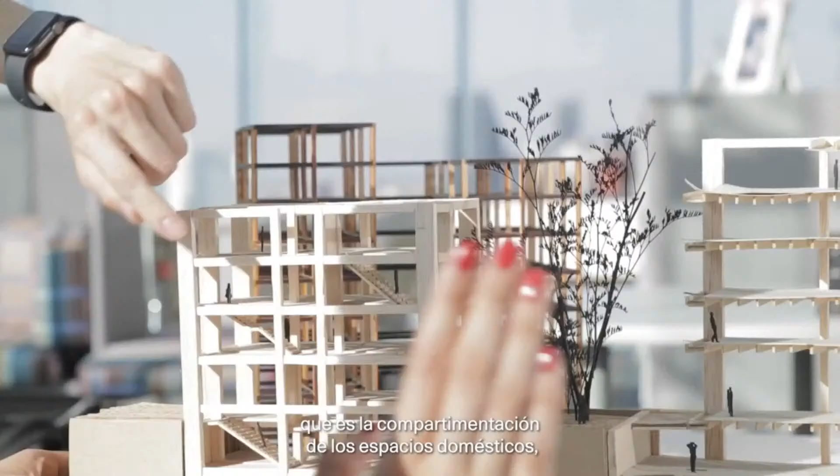Una de las cosas que aprendí en la maestría en vivienda es a no entender la vivienda de la forma tradicional, moderna, que es la compartimentación de los espacios domésticos, sino entenderla a partir de dinámicas familiares, de otros tipos de habitantes, una vivienda entre roomies, cómo es una vivienda para una abuela y su nieta.

Un cambio que hubo en mí fue como una capacidad de sorprenderme en cosas que normalmente daba por sentadas. Mi nombre es Bettina Rincón y estudié la maestría de vivienda en CENTRO.

Definitivamente, después de haber estudiado diseño urbano, veo la ciudad de forma muy distinta. Veo sobre todo, pues, qué se puede mejorar, ¿no? Cómo cambiando pequeñas cosas podemos hacer una mejor ciudad.

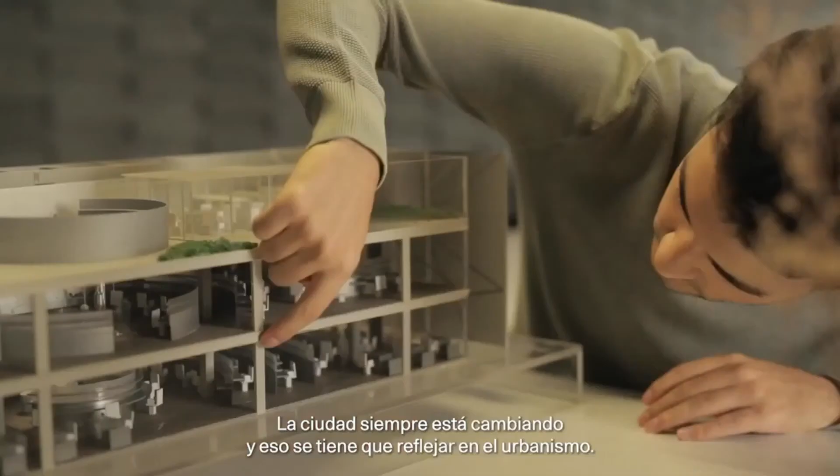La ciudad siempre está cambiando y eso se tiene que reflejar en el urbanismo. Espacios en donde nos sintamos a gusto, en donde podamos convivir, cómo lo que ya está hecho lo mejoras, que motive a la gente a salir de su casa y realmente a generar comunidad. Soy Esteban y estudié la especialidad de diseño urbano en CENTRO.

Yo me quiero dedicar al desarrollo de viviendas sustentables y me siento muy feliz. Creo que sí estoy en la carrera correcta, definitivamente. Me encanta lo que hago, todas las cosas que he ido descubriendo de mí, de la gente a mi alrededor.

Creo que lo que tiene que hacer la arquitectura es dejar de resolver por el camino fácil. Pues creo que podríamos aprovechar mucho mejor el agua, la energía solar, la luz natural, el calor natural, hacer de la naturaleza nuestro cliente principal.

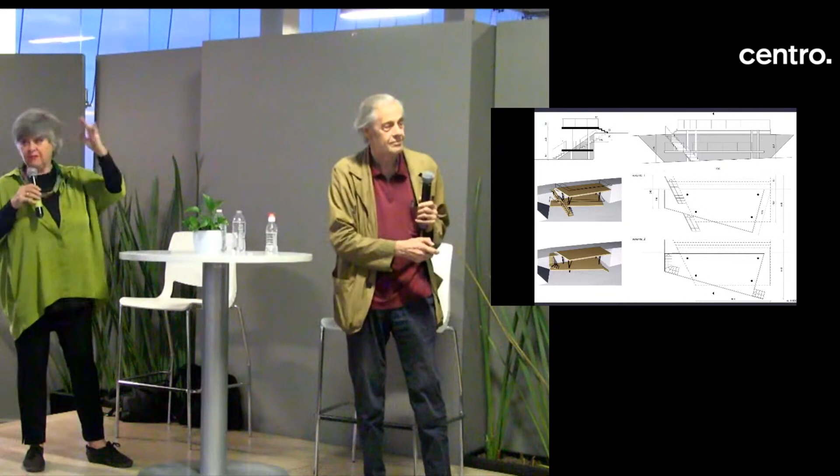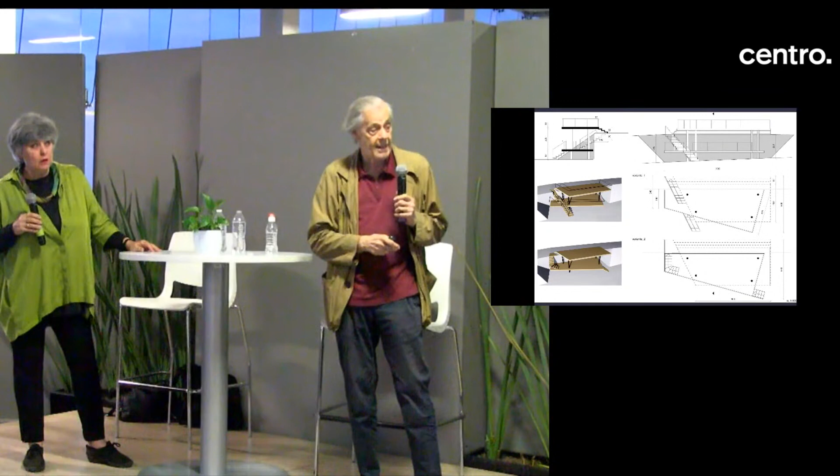So we have a slope, and two levels of terraces, and this offers the general view in a frame, like we know from Chinese landscape architecture. On the slope, we put this building between the two levels of vineyards. On the lower level, you have this framed vision of the landscape, and on the upper level you see what you always see, but from a different point of view.

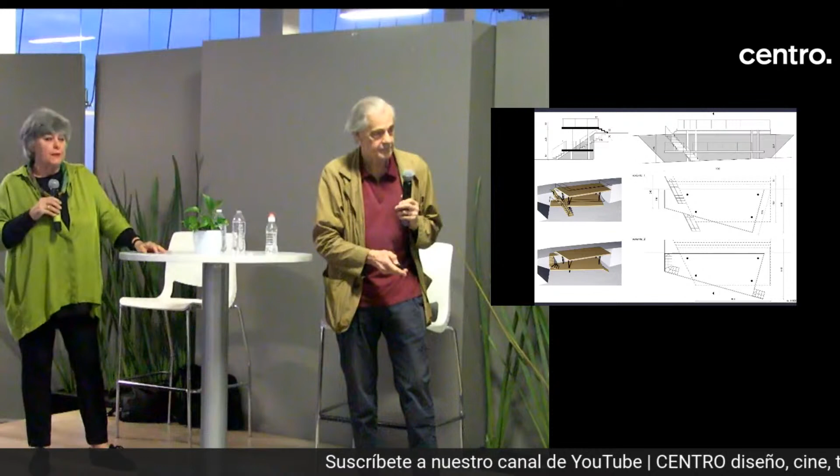The stair construction is made of steel columns and wooden decks, and of course railings. Here you see the slope. We have cleaned it up, as you usually do when you make a very little piece of architecture.

The idea was that this is going to grow in future, and it's sort of overwhelmed by nature. In the ground part, you have this framed view, and in the upper part you see it from a different point of view.

So it starts to grow. We even made a wine cellar here on the left side. And later, plants took over. So this is a kind of wine cellar where this wine grower can present his wines.

The idea was that he is going to present his best wines to international clients on this gazebo. So after it was finished, the son of the landowner made an opening party with 300 people, and from then on they used it quite regularly, while the plants steadily found chances to grow.

Now nature sort of prevails, and it disappears in a way. It's a metaphoric statement, and today we have achieved a state where you almost can't see it anymore. When you go inside these platforms, you have to discover the view, you have to conquer the situation.

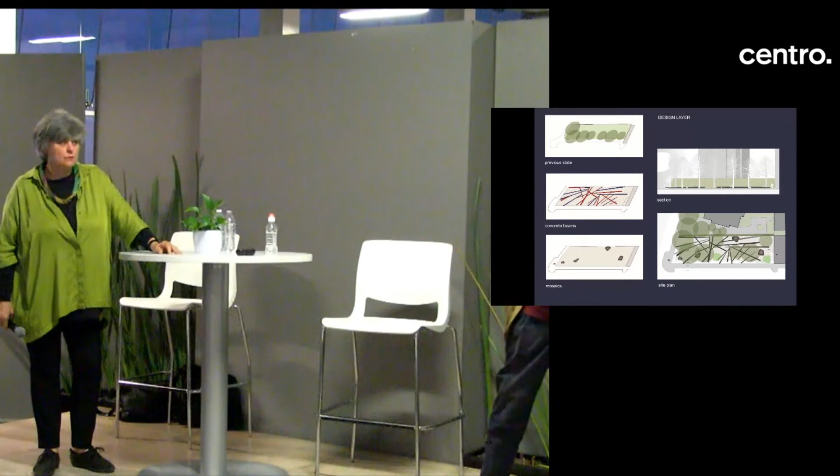So what are the layers of our design? On one side we have these 7 trees I mentioned. We did research about the beams, as I told you, that as a result of the fire the beams fell to the ground. We have a layer of beams as elements in concrete - you will see how it works.

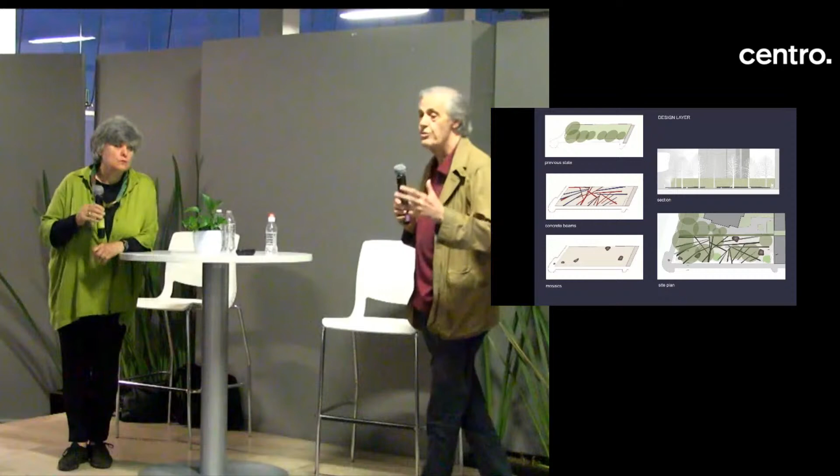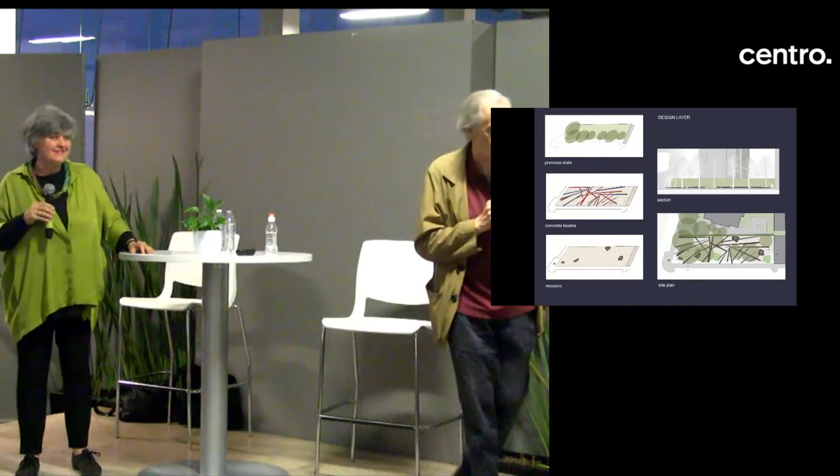We have mosaics which deal with subjects of Jewish religion that are at the same time important in Muslim religion today - fruit, vegetable, fig - but even elements like energy drinks which youngsters use today, Coca-Cola or something like this, and a pack of cigarettes too. So bridging the situation of today. And then, of course, you see a section and the final site plan.

These are prefabricated beams in a dark anthracite color. You see it from above, and the idea was that this is at the same time a kind of a cry for what happened. It's a graphic design, but it's organizing a space, and at the same time it's also furniture which you have there.

That's how it looks like. These beams sometimes arise from the soil, sometimes they go inside. Happy enough, we have various colors of sand, so we could order this curry-colored sand. You have an explanation of what happened there, but actually nothing else. And you feel that there are other rules than in general.

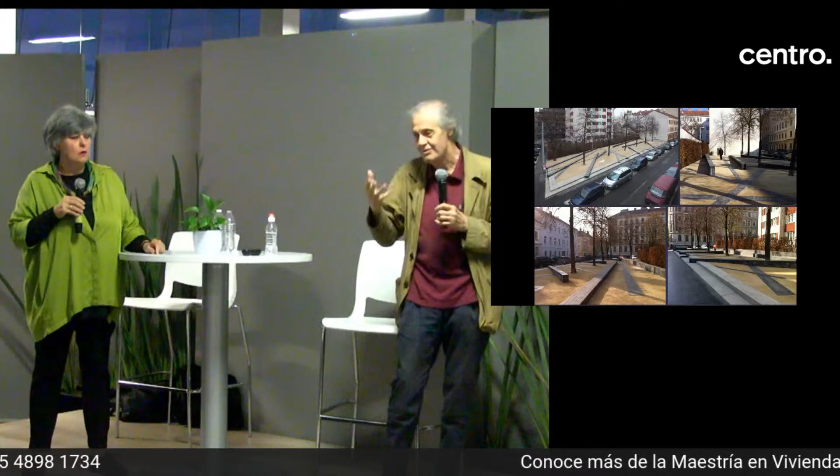The fascinating thing is that the young people who use the youth club around the corner are really silent on this space, and I asked them why. They said, this is like a religious space. So they feel something which we hoped to communicate, but it really happened - because there is a text on a big wall at the end that explicitly says what we are telling you now, so people know.

Here you see these mosaics we are talking about - subjects from the two religions which also correspond with everyday life. And it works in winter, in the snow, it works with rain. It's good for all seasons to meet.

For us it was very impressive that the youngsters from the culture club, from the Muslim culture, called us up saying, hey, go there, the dogs are destroying your design, hey come back, you have to clean up. So we had some sort of relation with the neighborhood during the opening of this. We presented this work in Tel Aviv and in Jerusalem, at the university, and we were a little bit concerned how the reaction would be.

The interesting thing was that students liked it very much because this remembrance site is abstract and not as realistic as very often these kinds of remembrance sites are. I think this topic is very current, as for instance in Argentina, or in Chile, or even still today in Spain.

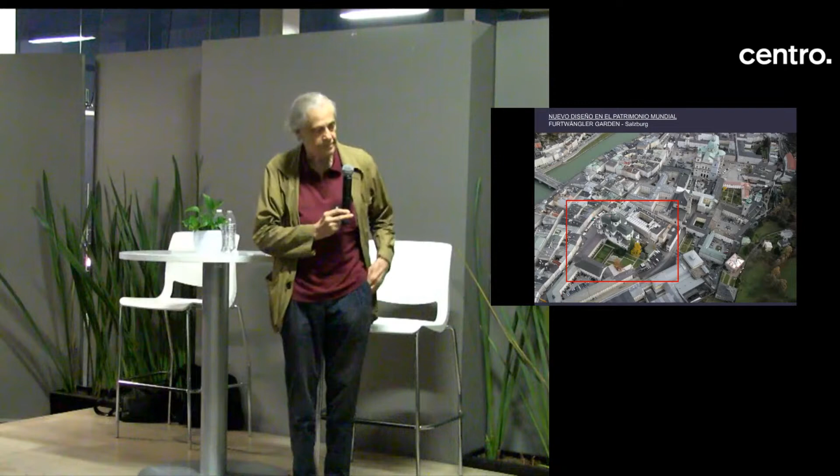What María mentioned is that these green spaces are always courtyards of monasteries—you only have framed gardens there, but no park in the traditional sense. So the question was: how can we find a design idea? How do we approach it? What is our reference field?

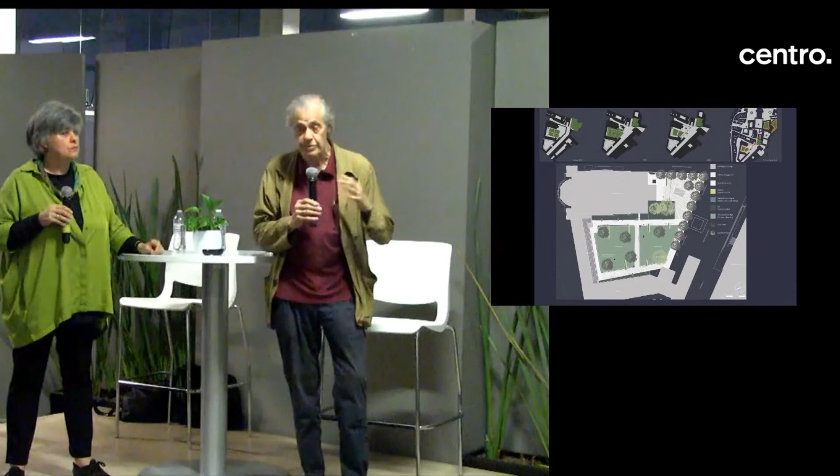You see here, we have these framed gardens—that's what we find today. This was the original situation from the 18th century, and this was the garden from the 1970s.

Our idea was to work with this frame concept. But the frame today is a path, not a wall anymore, but a very large path. You have to consider that this is a rather small area—2,500 square meters, not more. These paths are 6 meters wide; you can sit, walk, and gather there.

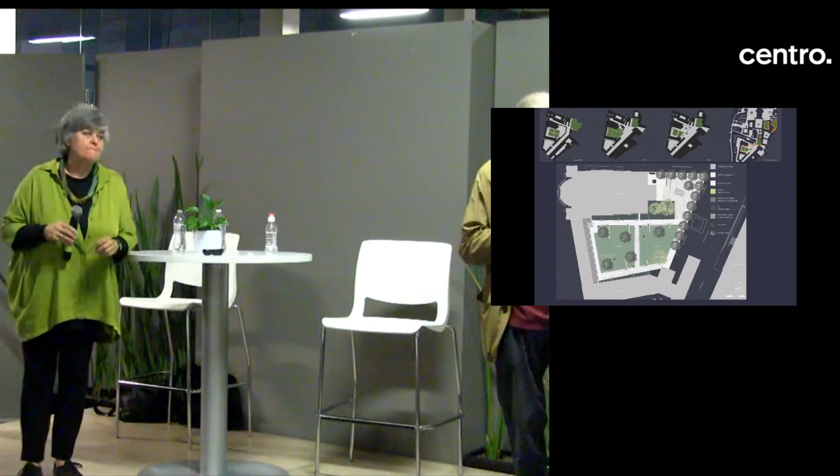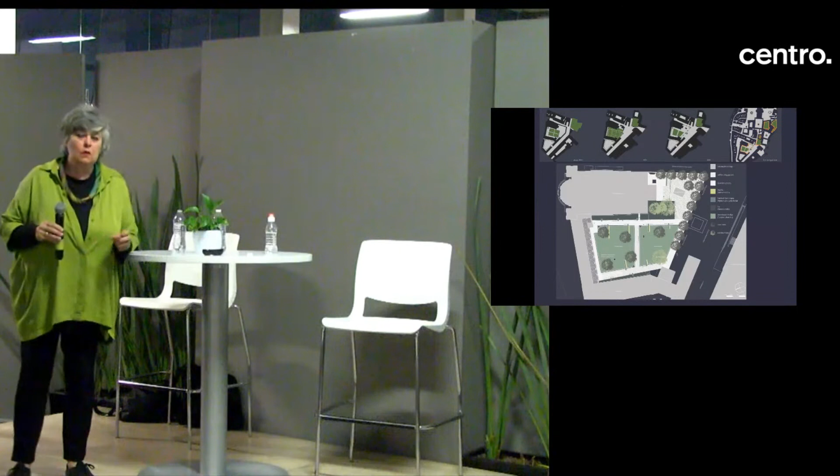And we have two lawns which are 27 centimeters lower, giving another feeling of space—27 centimeters in an open space is quite something already, you can feel it. We have sophora trees, and in homage to the Salzburg Festival Hall, we have these hedges, which act like scenography within the park, like a garden theater.

What's important now is the contradictions and paradoxes in how we approached a solution. The students of this faculty wanted special furniture. The festival hall wanted a stage where they could perform. The Liberal Party of Salzburg wanted the biggest playground area they could have. Our idea was to create an empty space—a sophisticated empty space—in which different kinds of events can happen.

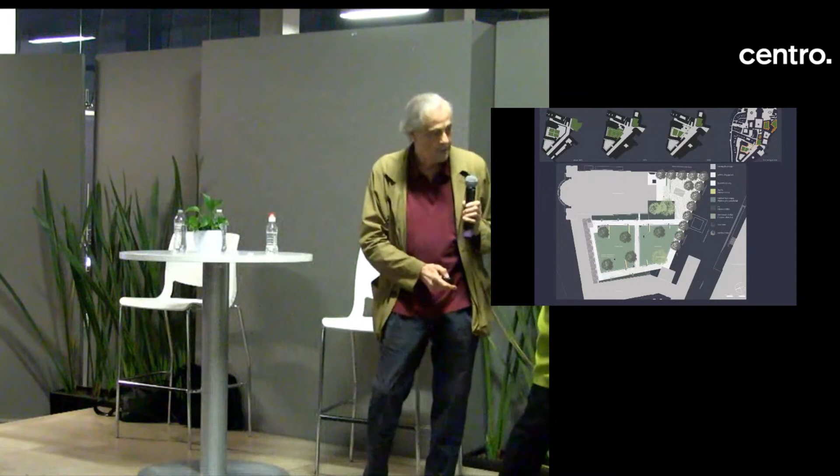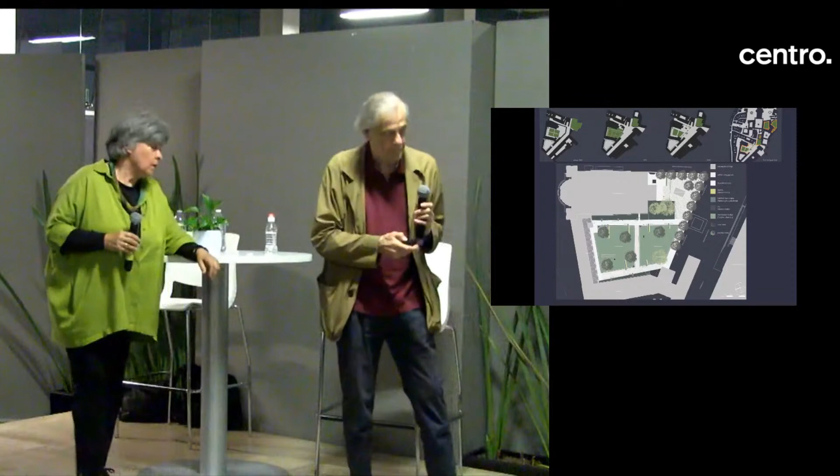We'll show you how this looks. We proposed and placed a piece of art, this pavilion by Anselm Kiefer, between religion, church, theater, music, and art. The central access paths are paved with natural stone, the others are gravel paths, and this whole area is covered by gravel. You see these sunken lawns and this scenography—it's actually a sculpture park with few but carefully chosen sculptures by international sculptors.

The frame of the linden trees also relates to the castle on top of the hill. The hedges relate to the entrance of the Faculty of Medicine, and the placement of the sculptures is located in this hedge garden. The hedges always overlap the path, which creates a little irritation—it's a bit unusual, but it still works with the historic ambience.

What's important now: the Salzburg Festival has performances there, the students like it, and tourists go there—but we didn't design functions. We designed a reduced space, and in this space, different events, different situations, different moments of everyday life can happen.

So there are a lot of fine details, and that's something we take great care of, to have a good stonemason, a good functioning design. And underground, there is a wild torrent running, a river. We have also shown above on the gravel the flow of the river. We have at night a lighting concept, and we have some fine detailing on how to create ramps and steps.

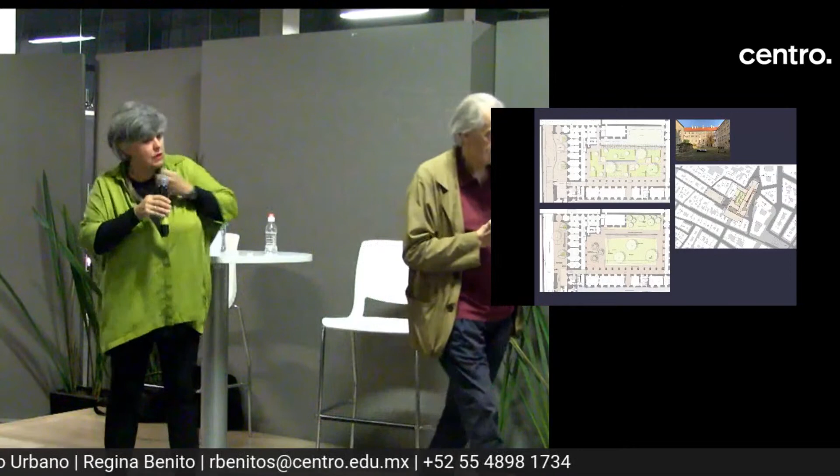And there was a neglected open space. Nobody knew this space. It was in a very bad condition. In the competition, we were the only ones who said, well, we have to use this, and it should also be a public space. The idea was to create a meditative space for the academy, which is at the same time a space for the public. You see, this is close to our cathedral, with very few open patios in this area.

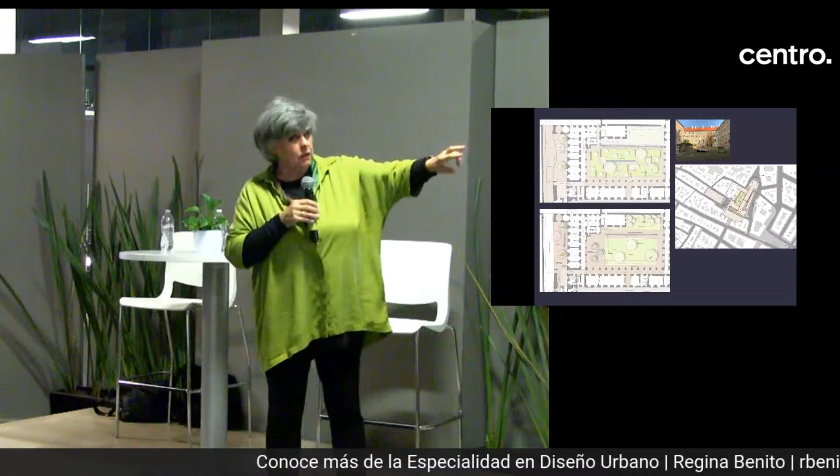The concept for the competition with Riepl Architects included a water feature and a pergola. It was a little bit like the concept for a monastery garden. We had a long water feature, and we had little squares to sit. You see how it looked like, really.

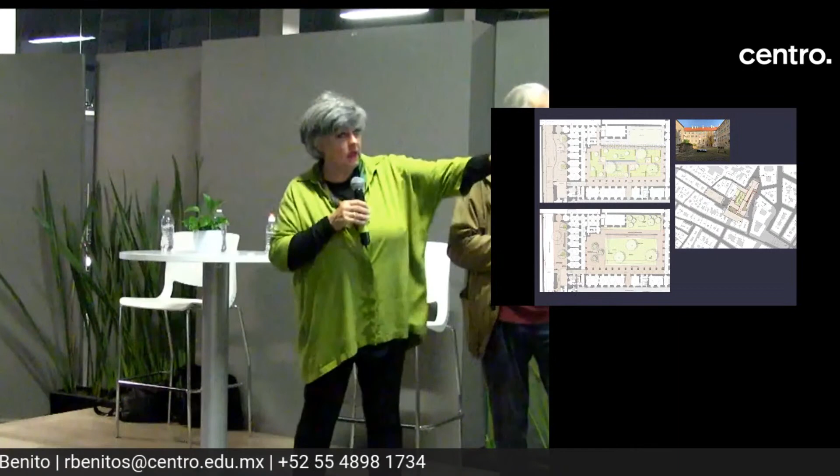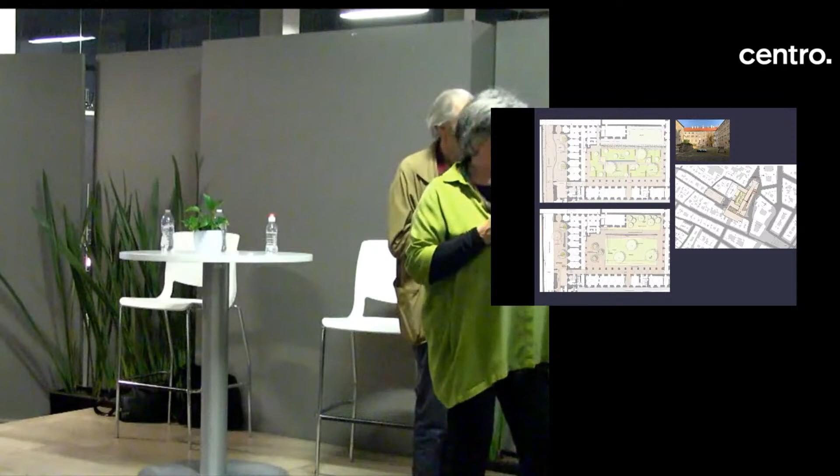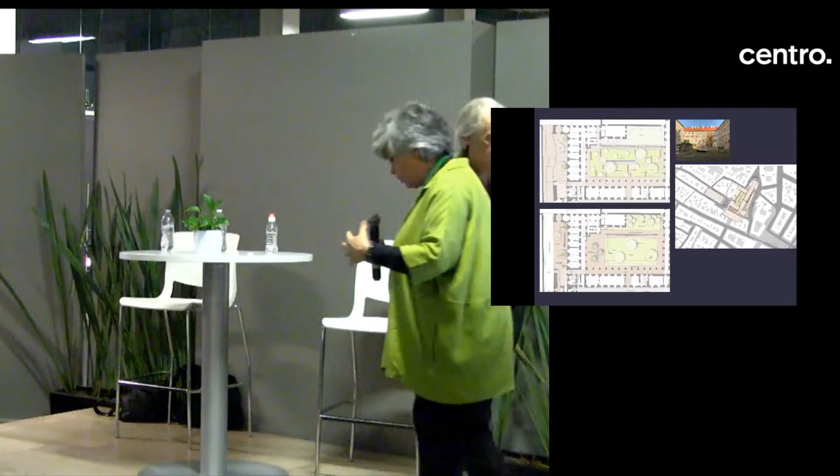We had a long pergola because this part is still used by the Jesuits, but that's what it looked like before—nobody had used this area in the last 100 years. So our proposal was to pass through, and the architects had the great idea to open this arcade, because it was closed for 200 years. Through this opening there is an interesting interaction of inside and outside.

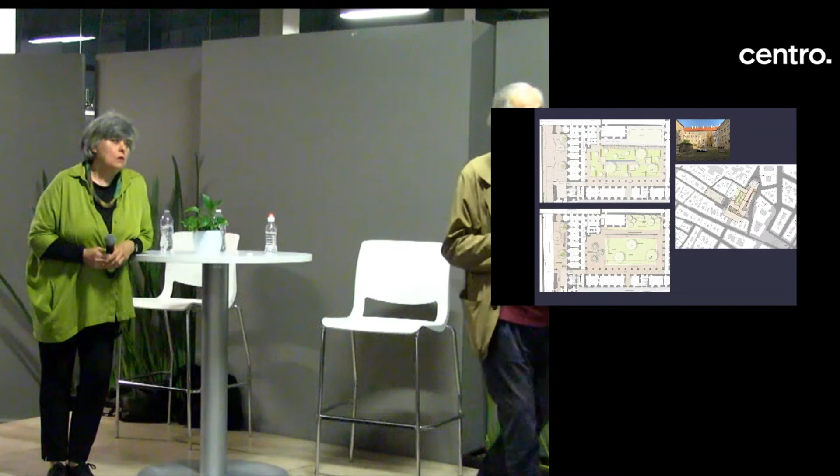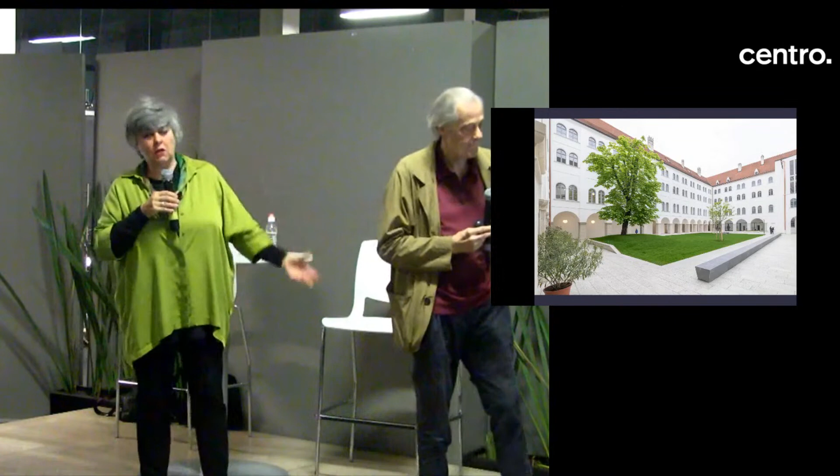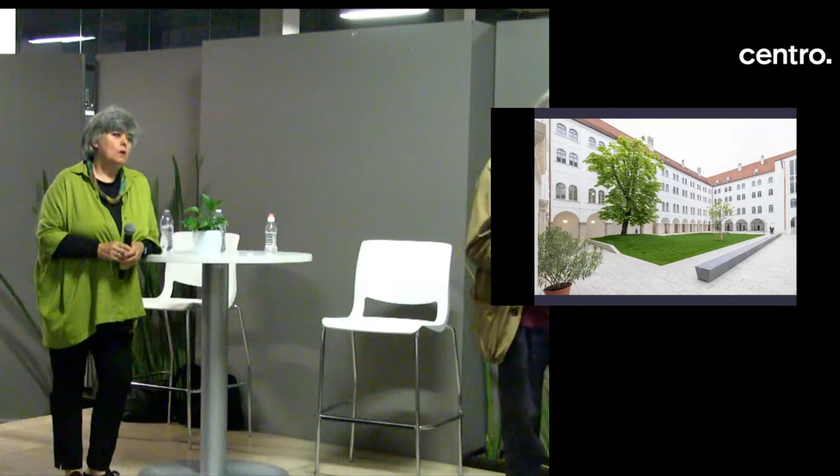At the end, we had to reduce the project also for financial reasons, as it happens so often. So we had a little square and this green area, as you have it here in your school, which served the Academy of Science. Actually, the faculty wanted space for 200 people to sit in a convention to listen to a lecture. So this long bench is actually the border between the area which the Jesuits still use and the other side used by the Academy of Science. So at the end we did very little, but this little work is very sophisticated.

And this is built over, but still from the 18th century. So we didn't have enough soil, or place for the soil, so we made this furniture, which at the same time incorporates these little multi-stem trees.

We also designed the entrance area, the entrance area in the public space of the street, to give an impression, like a visit card for the academy.

And here you see again, it's a place to meet, to pass through. Now it's really like a secret space for the public, but it's a meditative site, so to say.

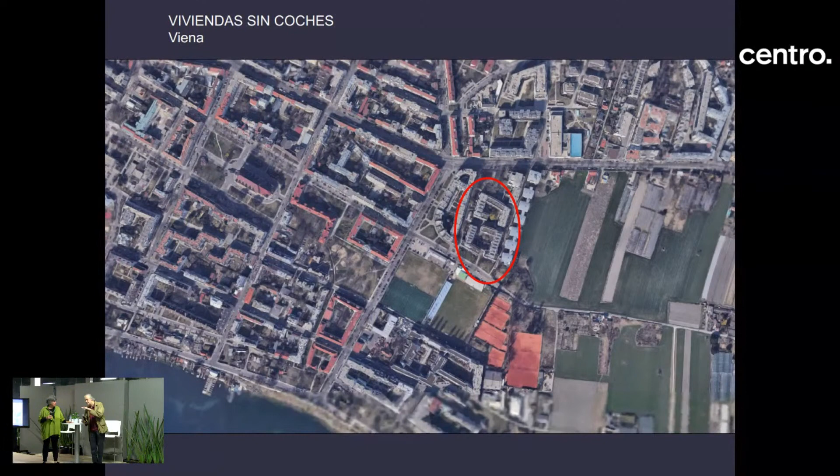Perhaps we explain it like this: we have till today competitions where developers, cooperatives, housing developers team up with architects, landscape architects, structural engineers, and economists.

And they are in competition for a certain site. And then when they win, they have to guarantee the price of the building for this site. So this is a quite incredible thing. And till today, all subsidized housing over a certain dimension has to follow this typology.

You see that this project was the first one which was not initiated by the Socialist Party, but by the Green Party. I just like to add, after the build opening and use of the housing, 5 years later, the City of Vienna clerks turn up for controlling whether this was all done in the proper way, so there is no way to cop out.

This is useful to show that in the beginning, some of these housing competitions on top of it had some social issues. One is housing without cars, because we have in our law for every flat 2 cars, garages. So with the money which they did not have to use for building garages, we were able to build roof gardens. So there was a change in the budget.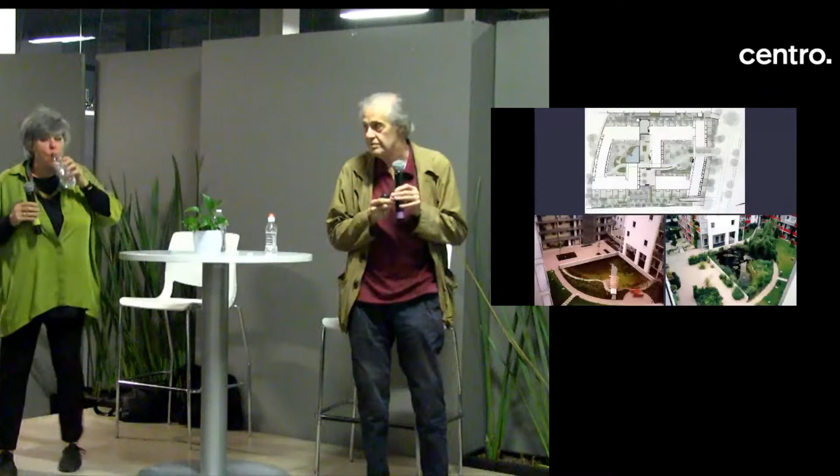And you have 2 parkings for each flat, like a big flat, or is that a method? It's like a minimum of... No, now we arrived at 1.2. 1.2 cars for each flat.

So this is a site plan. We have a courtyard with a pond, and we have a courtyard with a hill, and we use the roofs. All roofs have roof gardens.

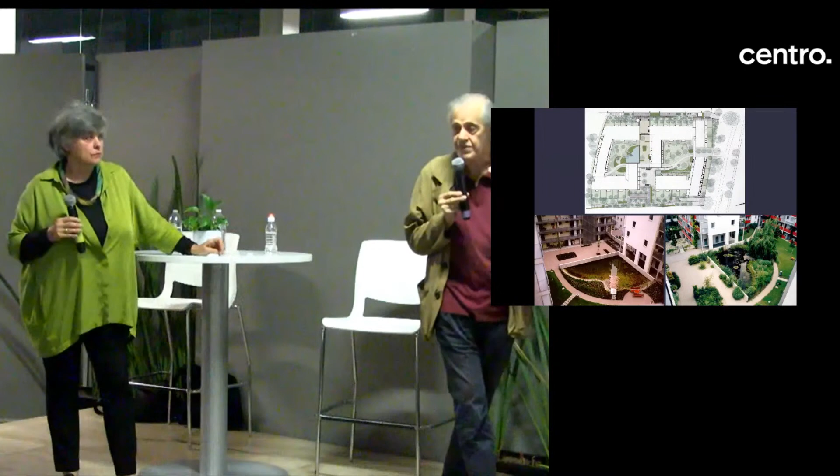Actually, it was done again, 157 families. Again, it was done with a group of already existing, like 120 people already on site. They were actually controlling for the biological products, whether they did not like styrofoam. So they went on Sunday on the building site and said, we are the future tenants.

We want to have a clean building site. And we had a group for the green, and we had a group for the child play. So they were taking part in the design process. What I explained you at the beginning is that time is like a building material.

So that's what it looks like when we design it on the computer in the studio. It's sort of implanted to the centimeter exactly. And that's what it looks like 10 years later.

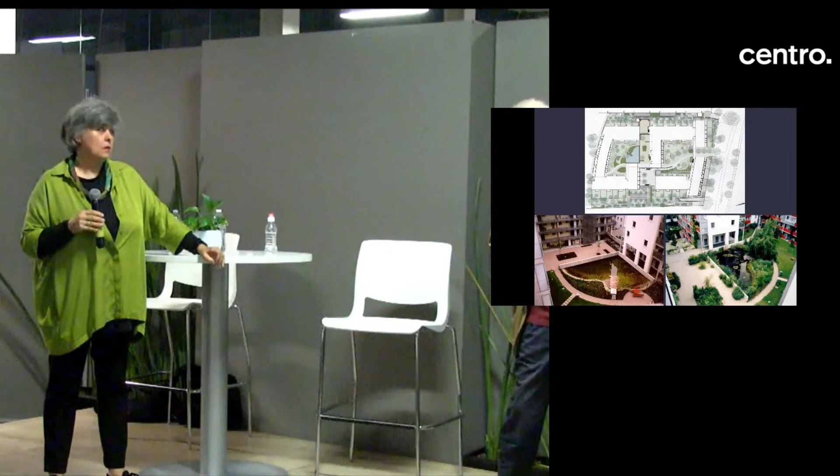But the important thing is, of course, landscape is not so wild in Austria as it is in Mexico. But this population wanted to have it as wild as possible. And their concept was as little maintenance as possible, because they had a deal with the city that they will do the maintenance themselves.

And therefore, photos 20 years later, it's really lush, thick vegetation. You see now how the weeping willow is on the pond. You see the sunken courtyard, which is good for parties, for the repair of bicycles. You see some details of what is nice about this project today.

Architects all over the world try to make architecture green. We are quite suspicious towards this greenery. But here it was really a conceptual thing by a special population, and they wanted to achieve this kind of sustainable architecture. And we can prove it works, because this is like 20 years later.

On the roof gardens, we had some roofs with vegetables, and we had the idea, these prefabricated guys, to enhance them, we can make them out of concrete. And they really liked the idea of vegetables of concrete. But 10 years later, the tenants even used their old bathtubs, everything, just to make tomatoes, peppers grow.

Yeah, the next project is much more recent. It's 3 years ago. We have won the housing prize of Vienna together with 2 architects. And we had the chance to make the layout, the design for a common space in this area and to work on this central site and to make the master plan for the outdoor spaces in general.

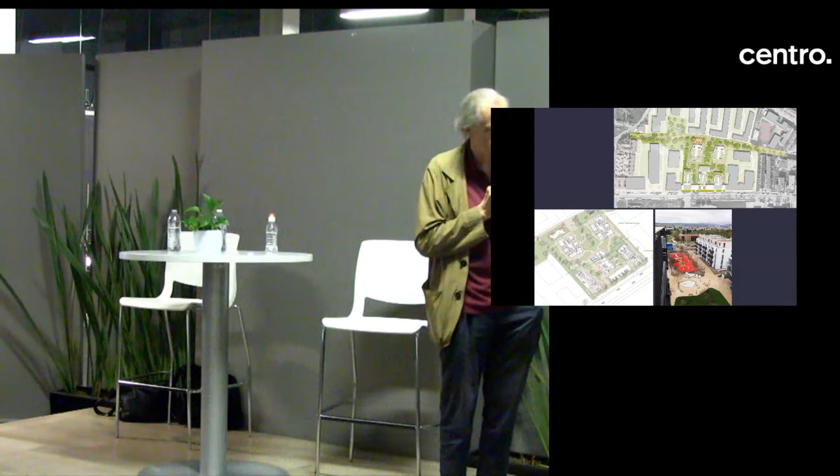In this case, you can think about 1,500 flats. It's real big, big for Austrian conditions, for our country. And actually the competition for the central core was quite interesting because we had the program that the fire department has to go through, the police has to go through, how to manage not to make a traffic-oriented landscape, but a landscape that is enhancing and connecting.

That is the word île flottante, which in fact is a sweet dish, what you call in Mexico postre, made of vanilla sauce and white dumplings. And that is what gave us the idea of these floating islands. This is also a kind of sociological concept behind it.

I just wanted to tell you, as we had developers here, we really invested in the playground. I think we have to invest in children. That's very important. They are not the last thing, the playground, but they were, in a way, the main thing here.

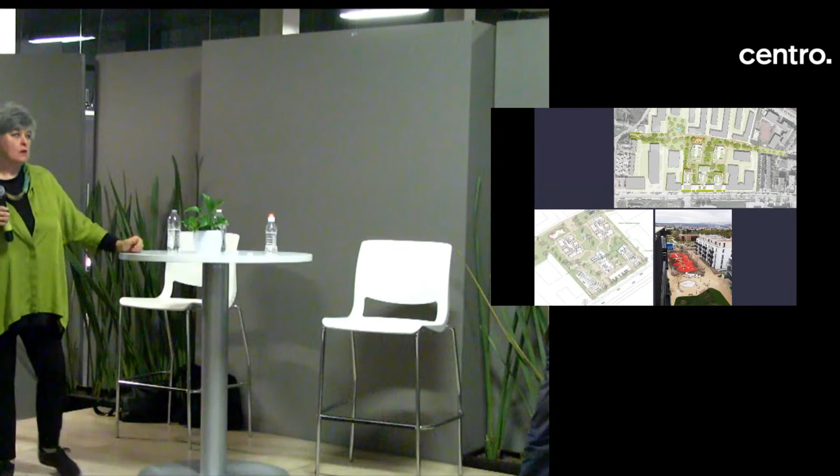We have this concept of public space, semi-public and private, which is a kind of sociological trap that we still move inside. But today, when you walk with your earphones, when you talk into your iPhone, public and private in the traditional sense don't really exist anymore.

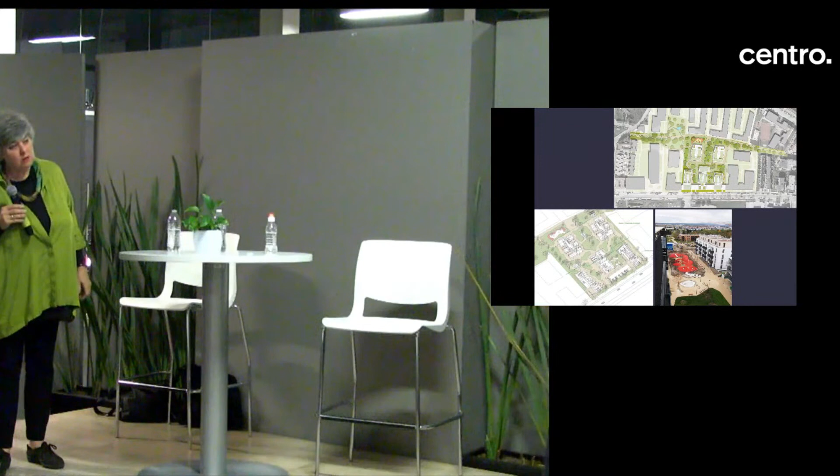So we created not paths as we used to, but a sort of floating islands. And when this path-like situation becomes larger, there's always a communal use of the ground floor. So they have, let's say, a meeting place, or some sport areas or cultural areas. Then it becomes larger in the layout.

So on the photos, you won't see the color of the plants. You can see it better, what this floating arrangement is. The photos are made in winter, but it gives you the texture of the arrangement. And we like color-coded plant design, so these are blues and purples. You have to imagine there are peppermint and lavender plants.

So here you see it 3 years later. The vegetation is, of course, dense already. And here you see this rather large sculpture for the playground. You have this sort of private feeling within this communal use space.

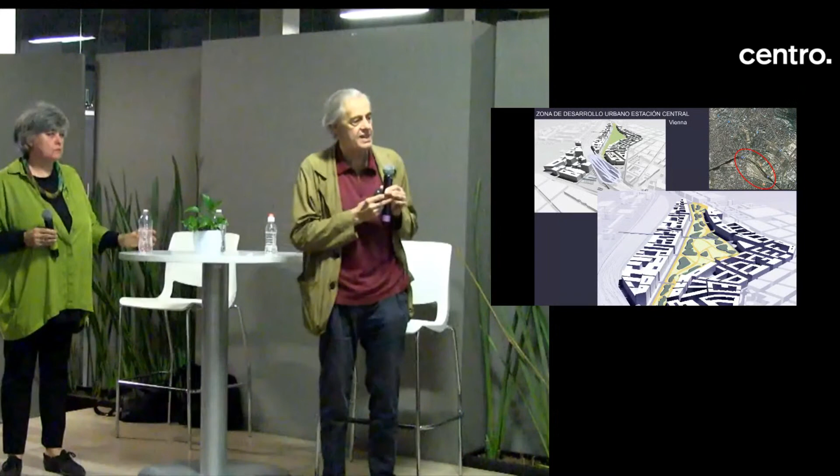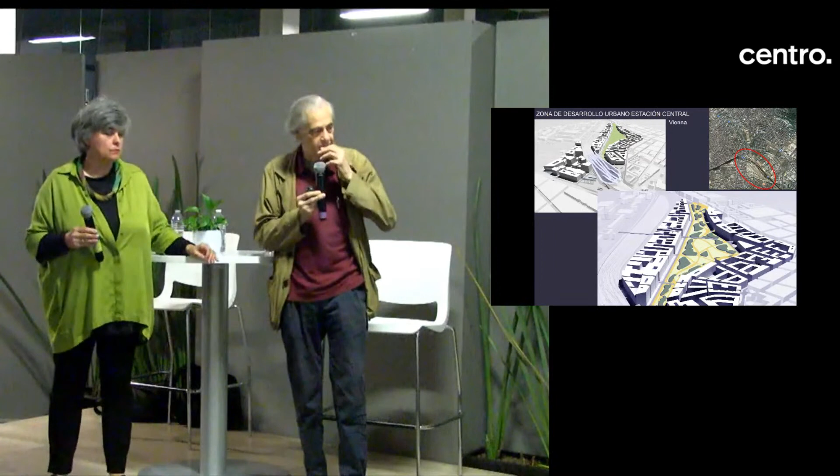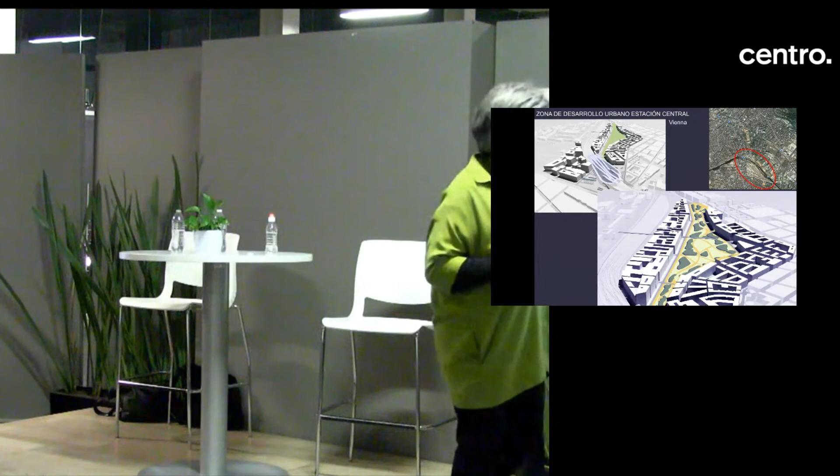The next two examples we'd like to show you are from a field we call landscape urbanism. The first one is the central station of Vienna, which took us 15 years, from the master plan to the end of the detail constructions. So here was one of the main railway stations of Vienna, the Southern Railway Station, and you had all the tracks in this area, and the city decided to make a new central station.

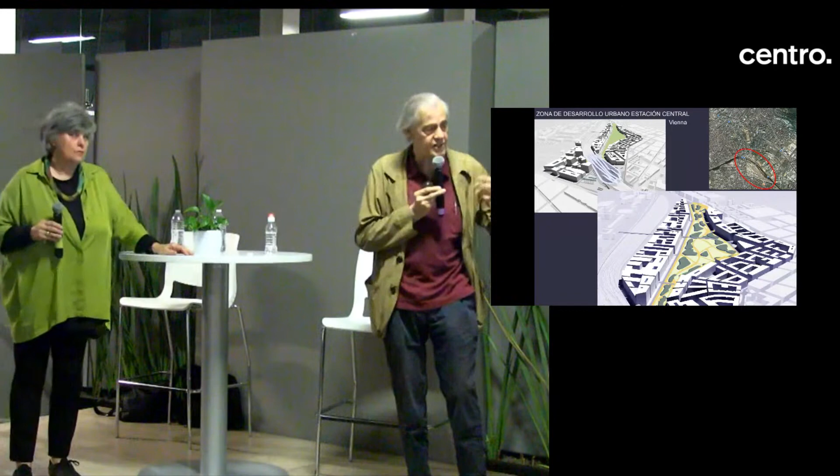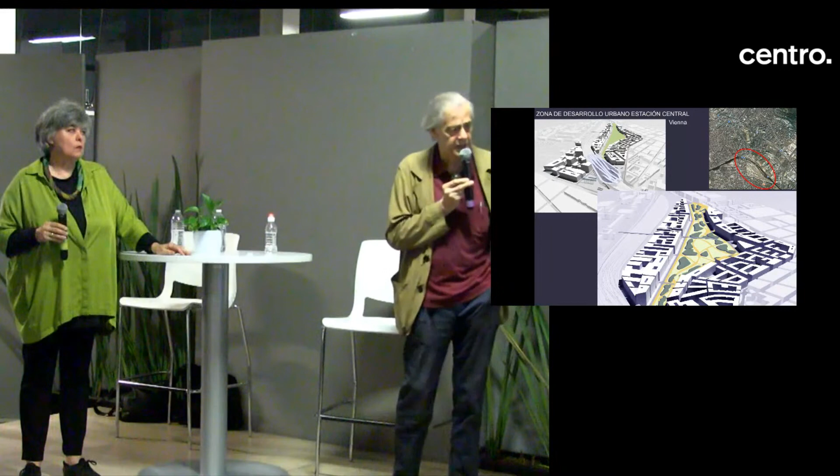Today the big European cities have very little land to offer for housing, always less and less. These areas of brownfields or railway areas are the last ones which are really large and can be used for new housing projects. We teamed up with an architect and had the chance to win the master plan. From the layout of the city, it's still a rather traditional concept, but the idea was to place a sort of central park into the middle, and these building sites should have interesting internal courtyards, with transparency and connection between them.

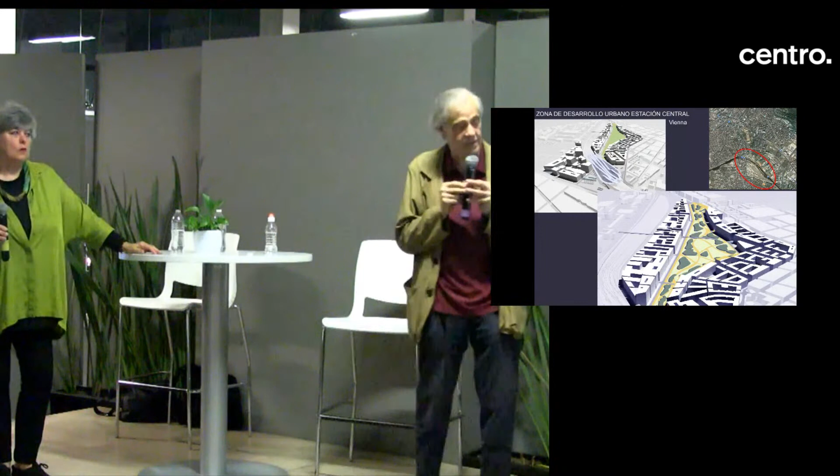This was a new competition, and we changed the master plan in this area. After this urban planning decision, first prize, the architects built the train station, and we concentrated on the next step, the office buildings. Our idea for this park was that with the concept of sustainability, we have a sort of group of dense trees, groves, little forests, so to say.

We have a complex path network with a special landscape of ornamental grasses, and we have ponds, sort of larger water sites. This was the idea for the master plan.

And then, of course, when we meet reality, this area became smaller. There are no ponds. They made a competition for the park, but as we had won the master plan, we couldn't build the park, we couldn't take part in the competition for the park. But at the end, a Swiss architect won this competition, and I think it's nice to see that they really realized a very large green area. You have to imagine that each of these building units is the result of a competition for social housing.

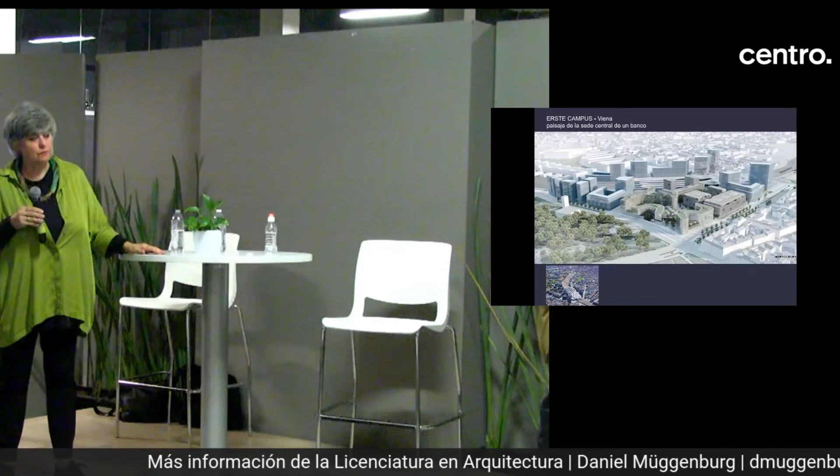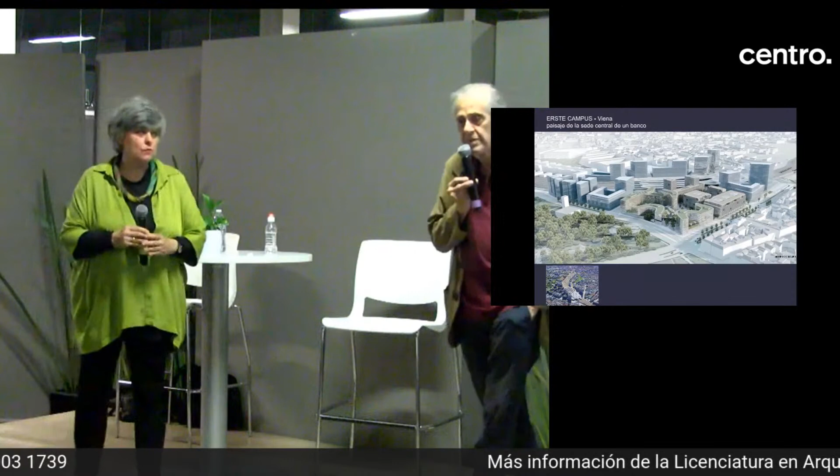And this part at the beginning of this whole area, which I spoke of before, there we changed the master plan. We teamed up with a very good team of architects, Henke Schreieck from Vienna, and we could win this. This is a headquarter for the largest Austrian bank, with 4,500 collaborators. The bank decided to choose this location, on the fringe of a working-class district, to make a symbol and a statement of education on this special traffic junction.

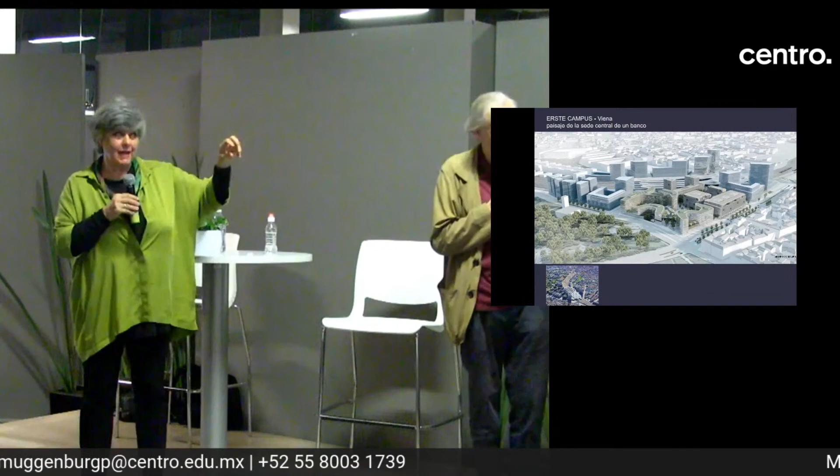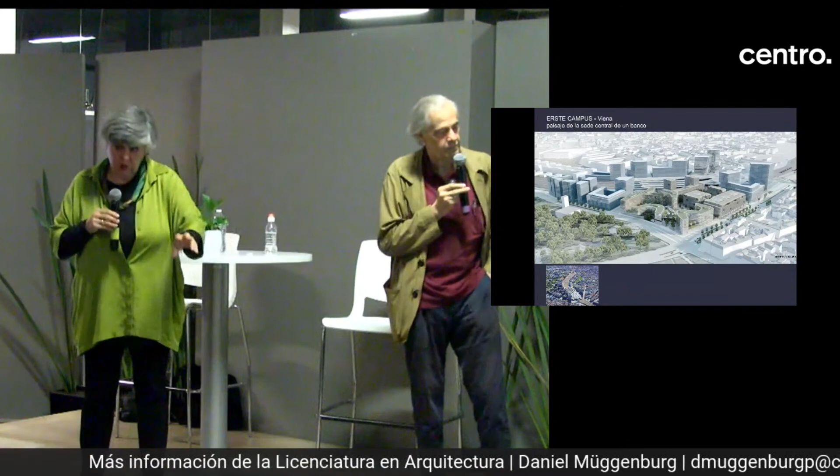Interior-wise, which might be interesting for your colleagues from the interior department, there are no single rooms any longer. Each working person can arrive with their piece of paper in the morning and choose their working space.

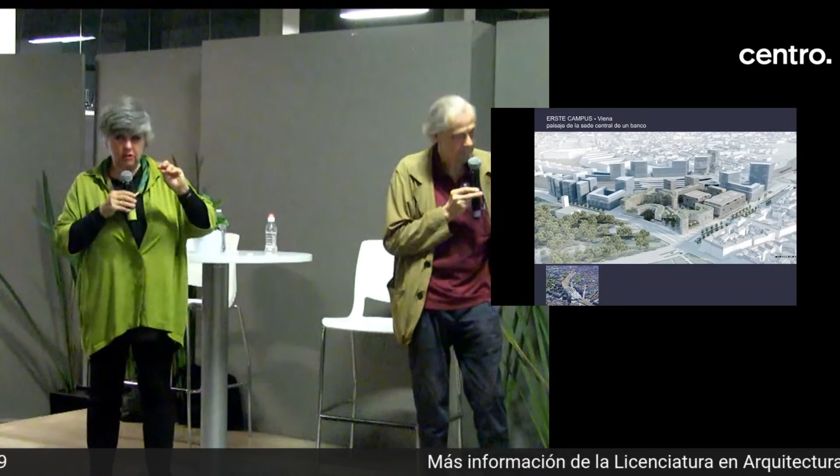We were told that after opening, people were so interested in views into the courtyards that they arrived even at 7 o'clock in the morning. The idea was we had a park from the turn of the century around 1900, and we wanted to prolong this park into the new site, so it's a very favorite walkway to go to work and back.

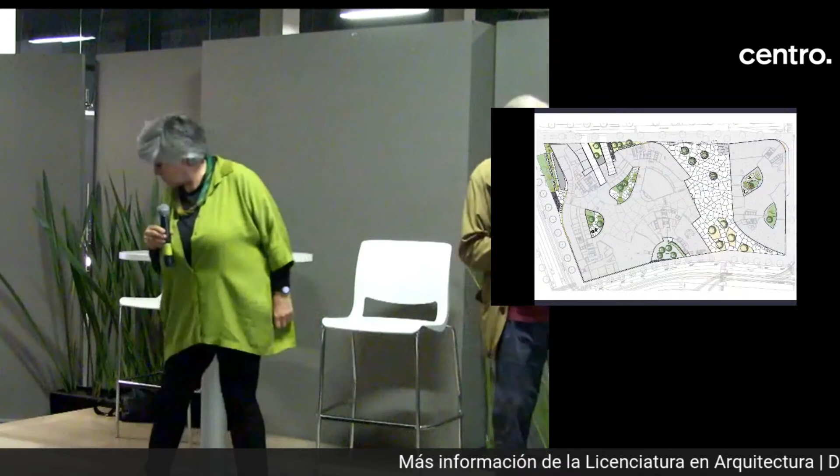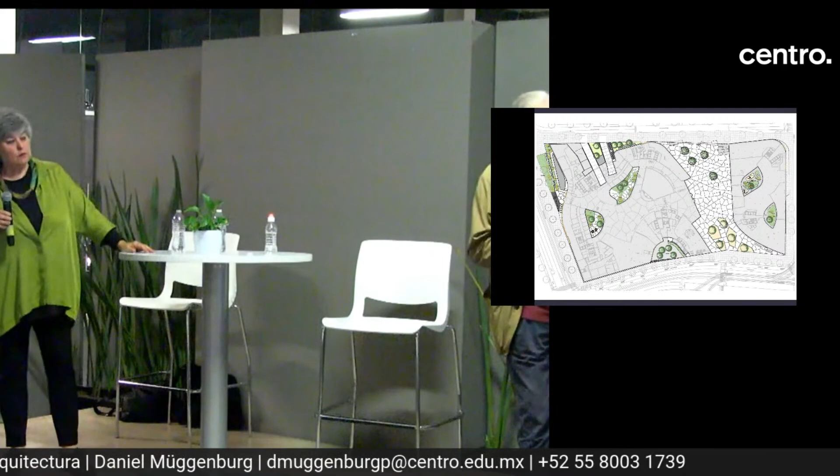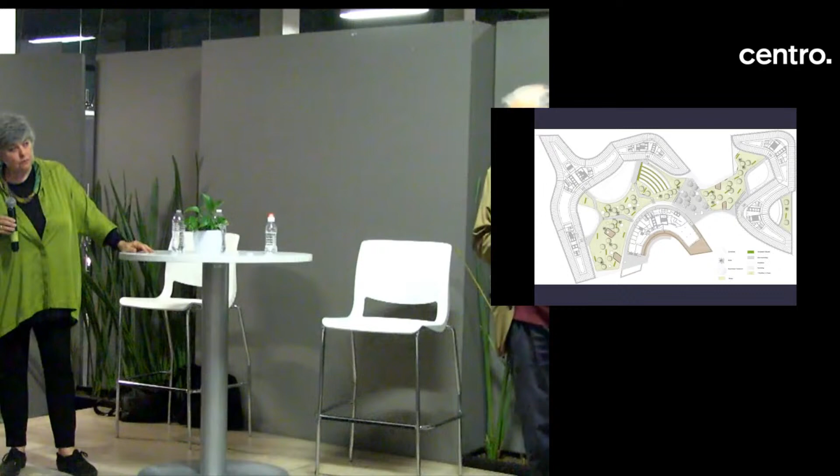On the ground floor we have 5 of these atria. We have a public space, a plaza financed by the bank, so it's actually a public-private partnership. But the highlight of this project is a 7,000 square meter large roof garden over the second floor, which serves the collaborators of the bank, the workers in this bank, and also has an event location which is open for a limited public in certain situations.

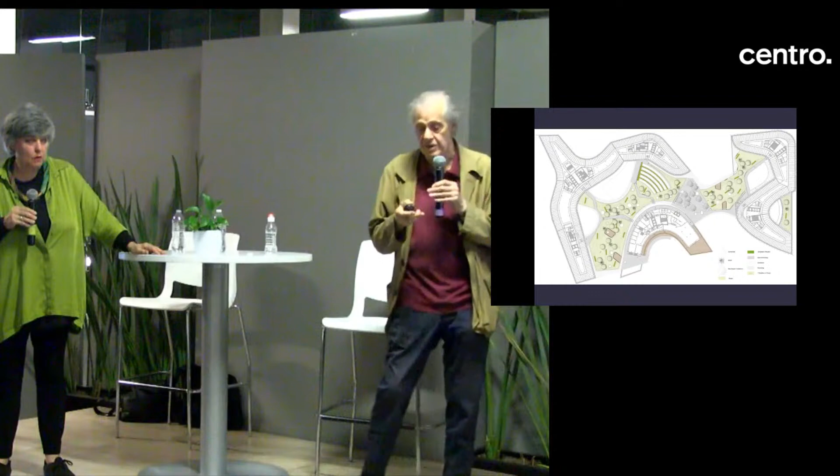For this floating park, we chose pine trees and Japanese cherries. The photo on the right above is about April, May. The photo on the left above is like late August, September. Down below the two photos show the courtyards, the patios.

You have wooden decks where people can gather and work together in outdoor spaces, which is of course in Austria a little bit different than here, because you can do it in spring and in summer. In winter, it's a little bit more cold there.

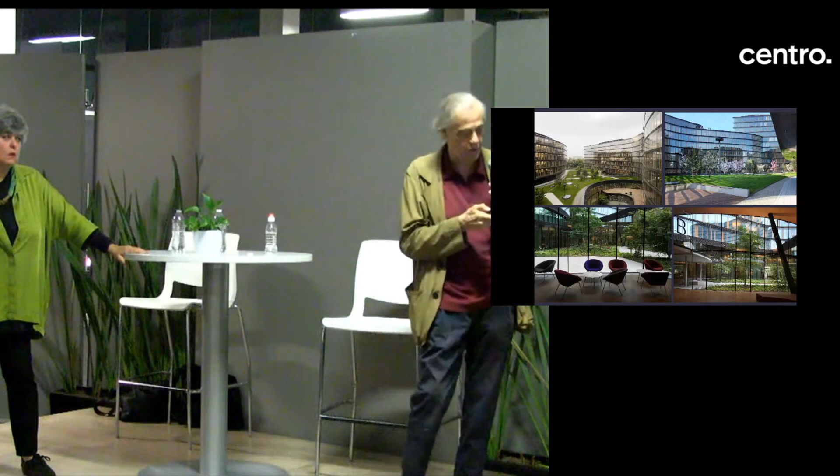And that's what it looks like 5 years later. It turned out that people started to work on the meadow, in the courtyard. They meet there. This is the passage where you can reach the train station, so people like to use these spaces.

As a last project, we are going to show you the Central Park Baku, which we worked on over the last 7 years.

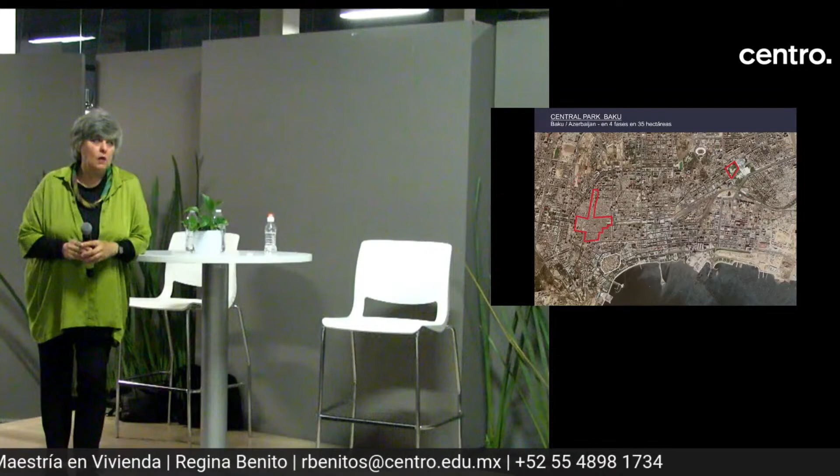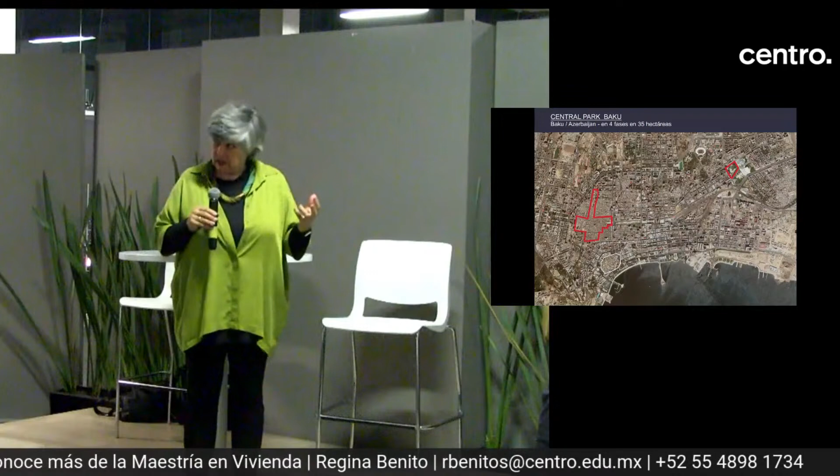It started with a competition for a park in front of a building of Zaha Hadid and Coop Himmelblau. Baku is on the Caspian Sea and is famous for its oil production. It was the first site in the world, the first country in the world where they had oil production. I like to add, in our language, if we translate it, Baku is the city of winds. It's a very heavy climate, very cold in winter and very hot in summer.

So plants have real stress situations there. On top of that, in the soil geological situation, oil is appearing, so if people build building sites, they have to be careful of some oil wells turning up.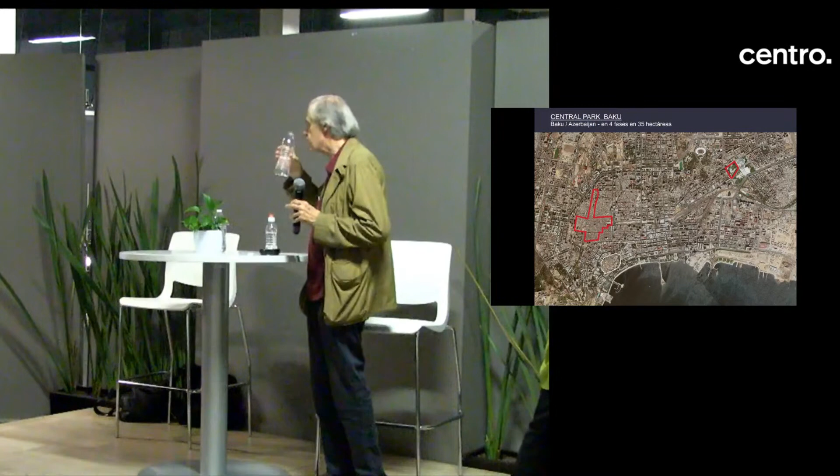The really medieval city is here. Then, because this is a nationalized issue, the oil industry, the local Baku people, even in the 19th century, invested the income from the oil to build an opera, a museum, a gymnasium. They really built, as you can see, like a Paris quarter. They really built a city.

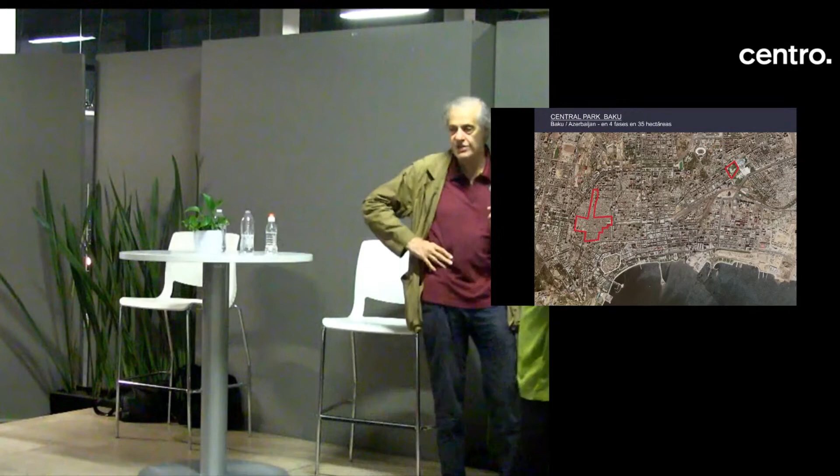In the 1920s, they had some German engineers create this shoreline, and they had a concept by German landscape architects to make a green belt system. Only then were they really intelligent in the machinery of drilling and pumping oil.

When the Soviet Union took over, Azerbaijan had 3 months of democracy. It's a bit difficult to explain, but it's between the Russian Tsars and the Soviet Union. What is important in this area here, so-called Soviet housing as they call it, is really a flat housing for a very poor population, but it was not a favela—it was just very poor.

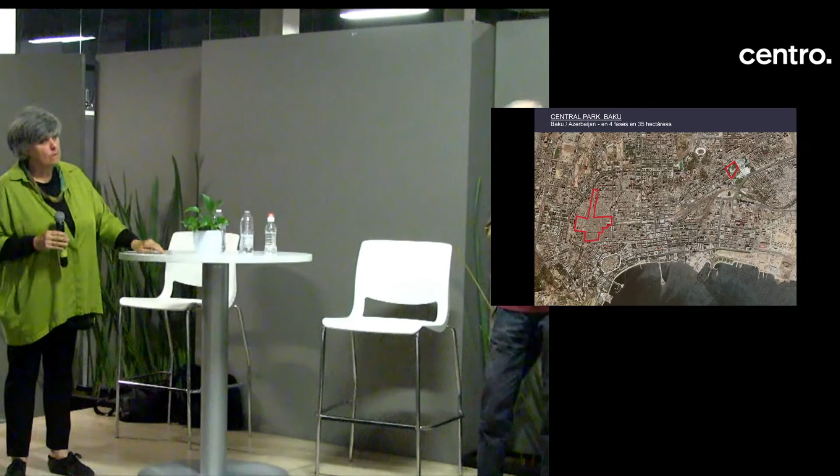You can find similar situations in Mexico City. But these buildings, this period of Soviet housing or of the oil workers, is regarded today as a situation they want to demolish, they want to overcome. As I told you, we won this competition for this park, and then we were invited to develop an idea for this area.

And we found out that other colleagues from Spain, from Italy, from France were also invited. And this, in Baku, we have a kind of an authoritarian regime. It's semi-dictatorship, so it's not easy to work in this ambiance.

But somehow we had the chance to win with an idea where we wanted to make a little bit of social housing and create a central park.

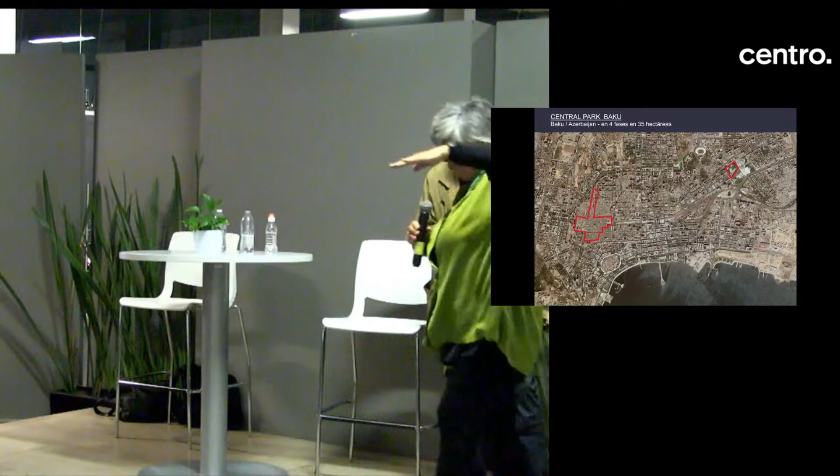I'd just like to add, because this is an aerial view, that in the time when we were working, hundreds of skyscrapers evolved. So I was speaking about the 19th century, but what you see here is 30, 40 floors high, you will see it in a moment. Not interesting skyscrapers as we find them, well, in Mexico City, in a way, but post-modern, medium skyscrapers which are rather ugly, but they are appearing like mushrooms in the city.

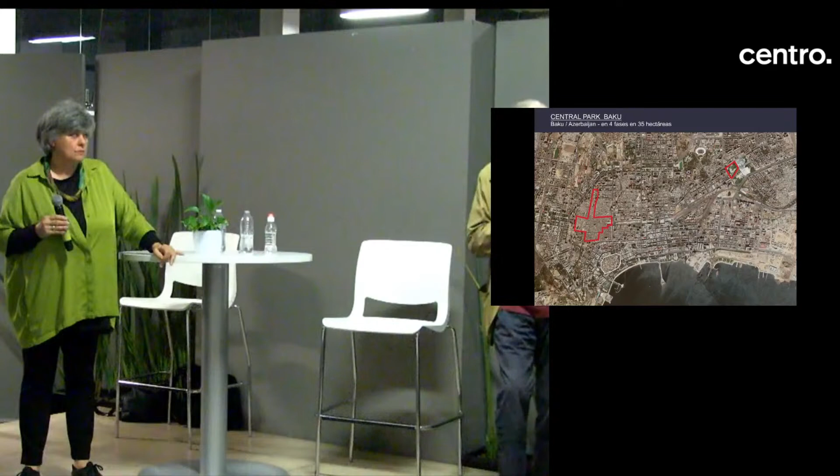Well, depends who is hired. I mean, there's a Sir Norman Foster.

Now the working story there was, in an abstract way, we were asked to develop for a first phase a concept for an area more or less like this. That's a national theater. Here you have the large mosque, which is the biggest mosque in the Caucasus area.

And while we were talking with our client, our customer, negotiated with the Ministry of Finance, the street authorities of the city have built two highways with four lines, each of them with four lines.

So we suddenly stood there and we didn't have a whole area anymore. And each of these strips is something like 70 or 80 meters large and 500 meters long.

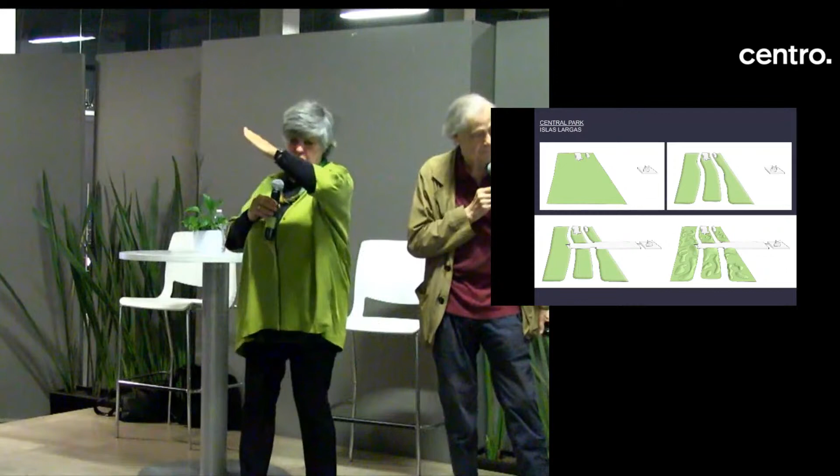And all the area is on a slope of 10%. So besides that, you have to imagine now you have a slope. There is the largest mosque in the Caucasus. They got the grand idea to build into the slope an underground garage, four floors high.

So we had to deal with these elements. And of course, we could have said, we don't work in this context, it's enough. But I think our chance was to create something for the people who live there, to offer them a green space, a landscape, which they never had to use like that.

So the first task was that we couldn't cross these streets. They couldn't cross to go from one side to the other. So we had to create some kind of bridge. And then there was this, what are we going to do from the bridge to the mosque, where the garage is under it? So it was a real challenge.

And that was the topography. So we created something we call croissants, formed earthworks to create less noise and spaces for lawns where you can be by yourself.

The idea was, of course, we had to hide the cars in a certain way. We had to create a situation where you could stay and not have the feeling to be in the middle of the highways. And this works only with topography.

And now happens something very, very interesting. As I told you before, we like to think not only in functions, but in spaces, so to say. And there was no program on the side of the customer.

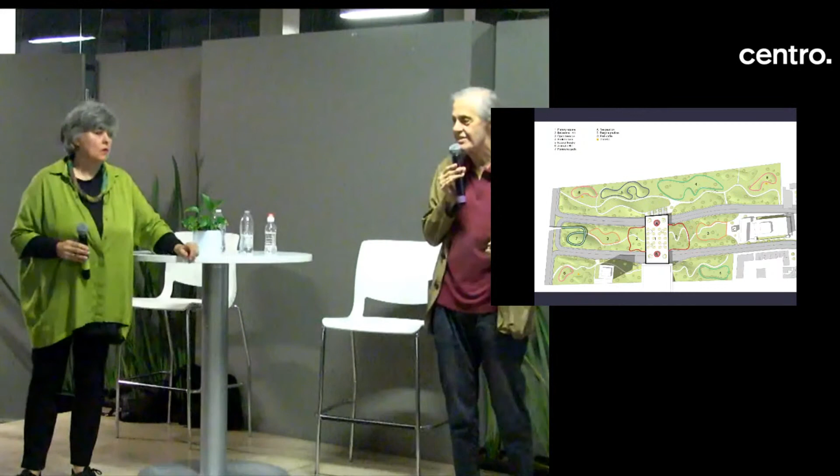We have open meadows, like you have it here. We have sunken lawns, they are a little bit deeper. We have something like a natural theater. And in these special kinds of topographies, certain functions can take place, but we didn't design the functions. I think this is very essential.

And we had, of course, you will see, we had a second part, but also to bridge a big already existing highway on the other side.

So again, the whole area is on a slope of 10%, and it was, of course, necessary also for disabled people. That's why we have these kinds of serpentine paths. It's not just a formal play, it needs to be like that.

And here you can see how we sort of hide the cars. The cars are behind it, the highway is behind it. There's a kind of hill.

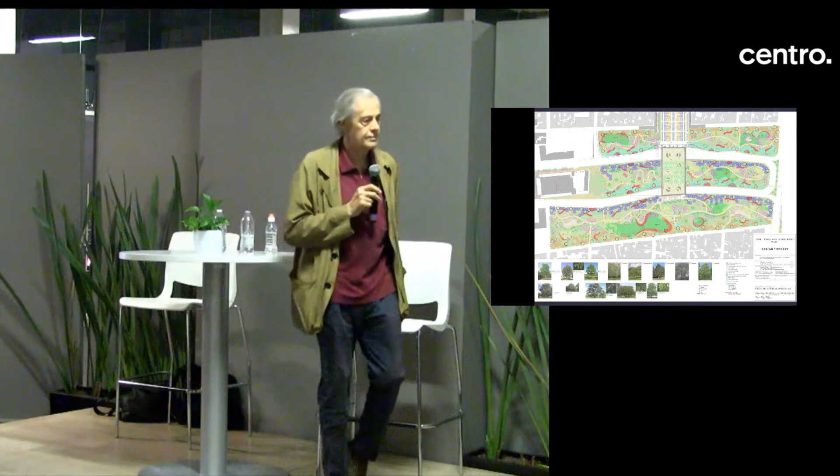So this is now the landscape plan, and it's actually a well thought-of concept. Imagine the blue trees and turquoise trees are shielding the traffic, and the red plant beds form like a frame for the lawns.

We chose regional, tough, climate-fit plants. We learned a lot about the vegetation of Turkic countries because we had to select plants sturdy in hot months that keep snow. So it's on the verge to have the olive tree. It's difficult, but it's also possible to have Morus alba, a tree you have in your country with black berries. It was quite interesting which selection we managed to choose.

Evergreens, like Lebanon cedars etc., form important vistas. They don't have nurseries, so we call it, I think, viveros in Spanish. We had to import the trees at the beginning even from Italy, and then we imported from Turkey. In the last project phase, they could already grow trees in Azerbaijan.